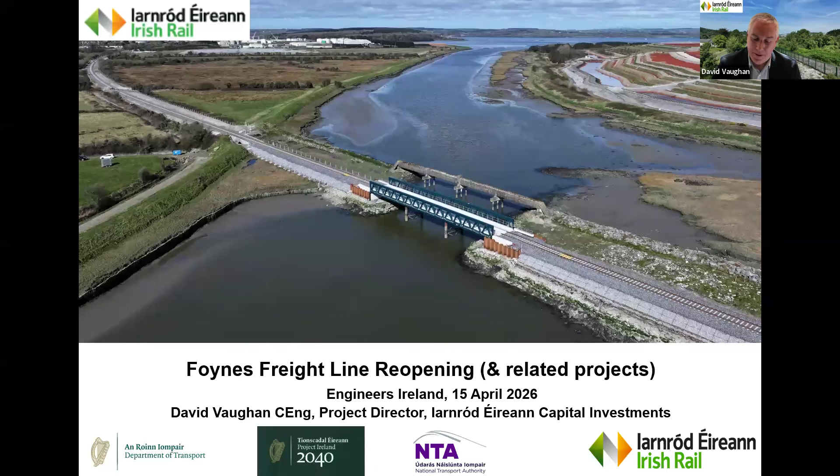So my agenda for the session is to give you a brief history of the line and why we're reopening it now, the project at a glance, an overview of the scope and delivery, some engineering highlights with lots of photographs, a little piece on stakeholder engagement, and then some of the challenges and solutions that we came up with. A brief touch on the benefits and impacts, and looking ahead for the line.

I'm going to also cover a small piece on the Adare bypass and the rail overbridges that myself and my team delivered in parallel with the railway project, to enable the bypass scheme to progress at pace. And I'll touch on as well some work we're doing with the Ryder Cup 2027 rail transport plan, and then we'll take some questions at the end.

So history-wise, I won't dwell on this because I know we're under some time pressure, but the line itself was built in 1858. It carried bulk freight materials, minerals, coal, oil, zinc, lead. It was a mixed use line, so passenger and freight up to 1963. And then the passenger service ceased. And then the freight business also ceased in 2001.

Now the line always remained under Irish Rail's stewardship. The structures were intact. The corridor itself had very little encroachment. We were commissioned to do a feasibility study into the line reopening back in 2013 by Shannon Foynes Port Company. And then we progressed with preliminary design and planning in 2014, and were then commissioned to carry on with the detailed design stage in 2017.

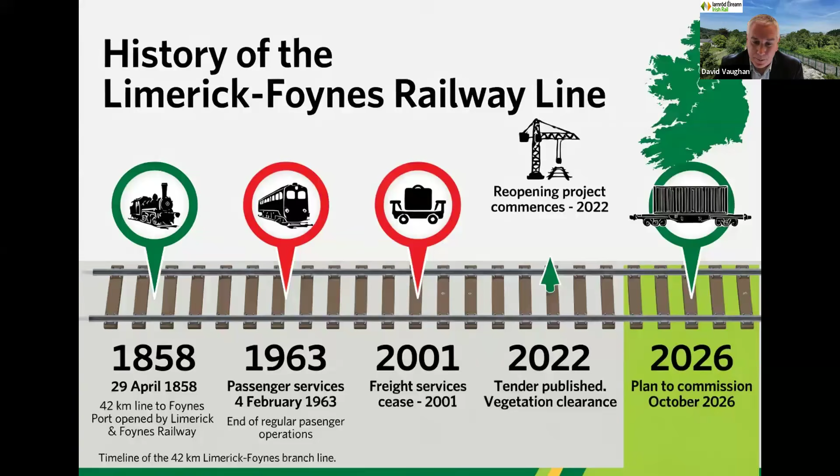That was, again, spearheaded by Shannon Foynes Port Company, in fairness to them, and co-funded in the latter stages by some European funding. We finished that in 2019, and really there was no funding to progress the project, so it sat on the shelf until in 2022 a funding opportunity arose, and we had to quickly dust it off, update the documents, and progress at pace.

So why now? Well, it is a key objective of the Irish Rail freight strategy. One of the objectives, without going through it blow by blow, is to either connect or enhance connectivity to all of our main ports, and to grow the market share for rail freight. So this is a key plank of that strategy. It's also a key feature of the Shannon Foynes Port Master Plan 2041.

It satisfies several EU, national and regional development objectives, including providing part of the EU core network on the North Sea Mediterranean corridor. It's a feature of the Project Ireland 2040 planning framework. It's well regarded and mentioned in the Limerick Shannon Metropolitan Area Transport Strategy, which is a mouthful, but better known as LS-MATS. Also, numerous objectives in the Limerick Development Plan 22 to 28, and then it is also heavily featured in the All-Island Strategic Rail Review. So, well covered from a strategic context perspective.

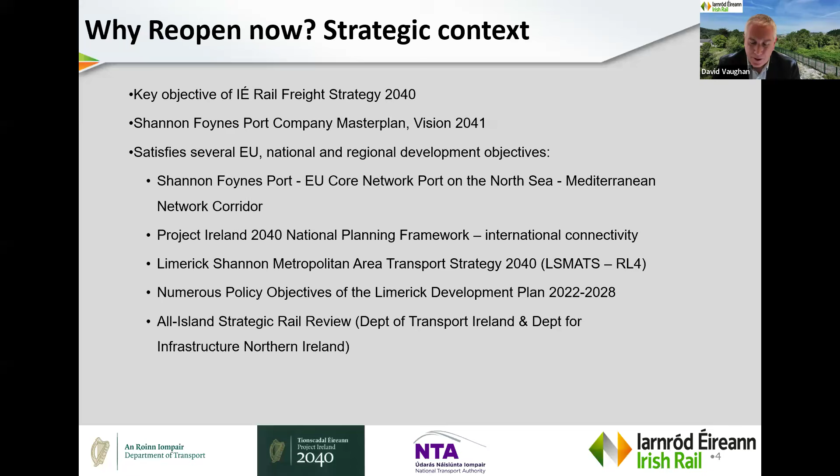The project at a glance: it's a 42-kilometre long rail corridor, single track line, and the total investment is 151.5 million, funded by the Department of Transport and the NTA. The line speed on opening will be 50 miles per hour, with a journey time of approximately 53 minutes from Limerick to Foynes, and there is scope to increase that to 70 miles an hour in due course. Our main contractor is John Sisk and Son. Our main consultant is O'Connor Sutton Cronin.

There's 81 structures along the route. This is underbridges, overbridges, and culverts. There were 67 level crossings, including 13 public road level crossings. And we're on target to complete the works and commission the operations in Q4 this year. October bank holiday weekend in particular is our commissioning weekend. And when I mentioned updating the documents in 2022, we increased the spec to make it future-proof for potential passenger services.

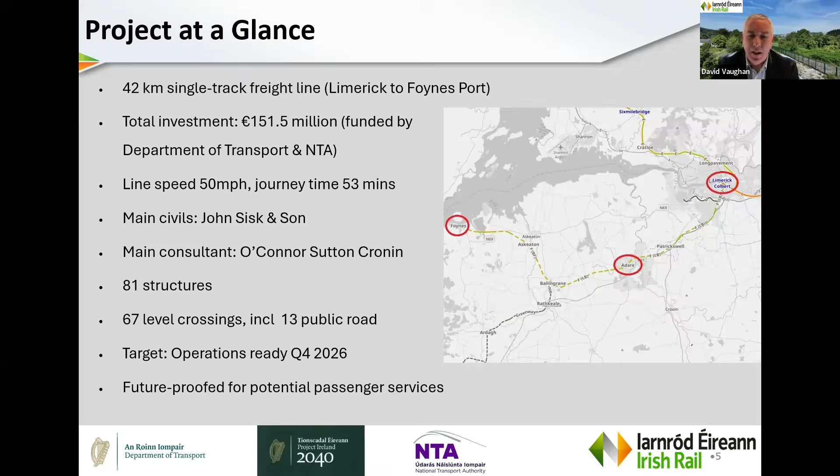So just to give you a feel for the corridor itself, this is a busy graphic, but bear with me. The railway line itself is indicated here in black. The blue dots represent public road level crossings. They were once operated by gatekeepers, now all being upgraded to CCTV type remotely controlled level crossings. The red dots are really like place names, just for people to understand the geography. A number of them were former stations along the corridor, including Patrickswell, Adare, Ballingrane, Askeaton.

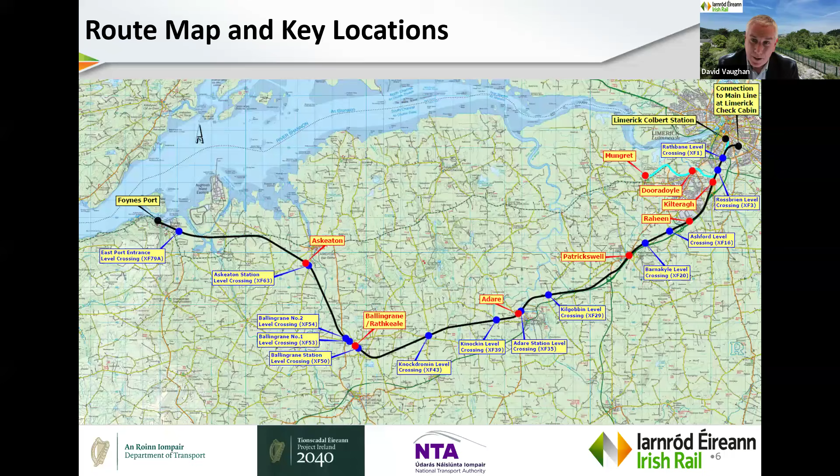The light blue line just up in the top right there, or cyan you might call it, is outside of the scope, but it is the old Mungret spur line. And then also on the top right, you might see what we call the North Kerry Curve, which was the former connection into Limerick Colbert Station. They're not in scope, but for the sake of getting your bearings, I just wanted to leave them on the graphic.

So scope and delivery strategy. We split the project into two packages or work streams. The first we called Work Package 1, Track and Civils. This was funded by the Department of Transport. It involved vegetation clearance along the corridor, replacement of the old track with new sleepers and rail on a fresh bed of ballast, rehabilitation of the bridges and culverts, including renewal of Robertstown Viaduct, the signature structure on the route, which I'll come to further. Upgrading the road infrastructure at the level crossings, and then renewal of line-side fencing and drainage.

Then Work Package 2 followed on, and this is what we call operational readiness, and this is the signalling for the route, including the CCTV level crossings. GSM-R train radio, so GSM is the technology a lot of us are familiar with for mobile phone networks, but there's a version of that which is for railways only, hence the R, and that allows communication between our trains and our control centres.

And we were also endeavouring to eliminate accommodation level crossings where practicable. So this is really only by agreement and where cost effective. And in work package 2, we put in our track connections at Limerick and at Foynes Port, and then also at roughly the centre point of the line in Adare.

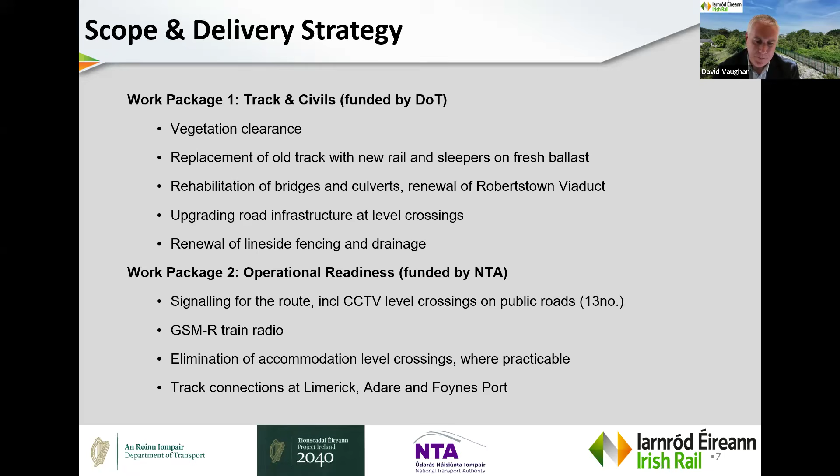So procurement wise, this is really a mixture of procurement and organisation. My team in Irish Rail looked after project management and track design and some bridge design, and I'll come to that later, and then the safety approvals, both internally and with the Commission for Railway Regulation. And our signalling and CCTV level crossing design was all managed, designed and installed in-house by our signalling, electrical and telecoms department. They looked after the procurement of all their own materials for that.

Rail and sleepers, we procured the rail. We have obviously a supply contract for rail, so that was procured very early in the job and delivered to Foynes Port. Sleepers, we normally manufacture sleepers ourselves. We manufacture a lot of sleepers every year, but this project came at us fairly quickly, and we couldn't meet the demand for the sleepers, so we procured those by competitive tender, and they were shipped in from Germany.

The main consultant I mentioned earlier is O'Connor Sutton Cronin. And the main works contract was an employer designed contract, public works. We moved quickly with it. We did an OJEU notice published in July 22. We basically got the green light in about June 22, published the notice in July, issued tenders in September, and awarded the contract to Sisk by December. And the scope of which was, as I mentioned earlier, mainly the earthworks, the bridges, the level crossings, track laying, and the civils for signalling.

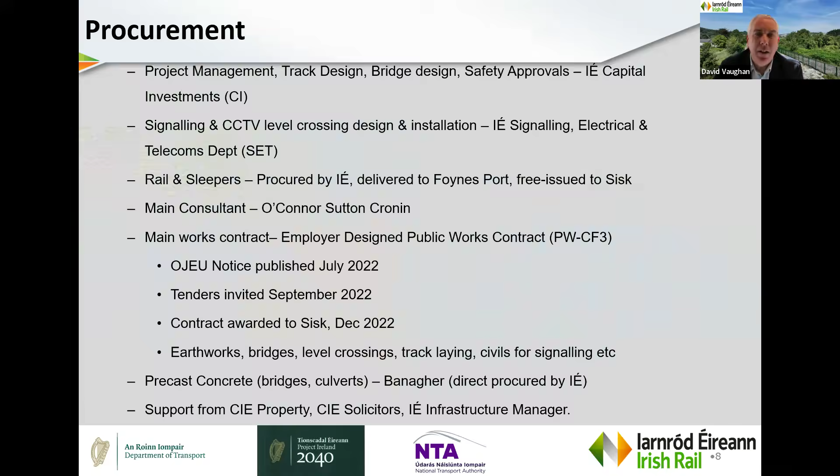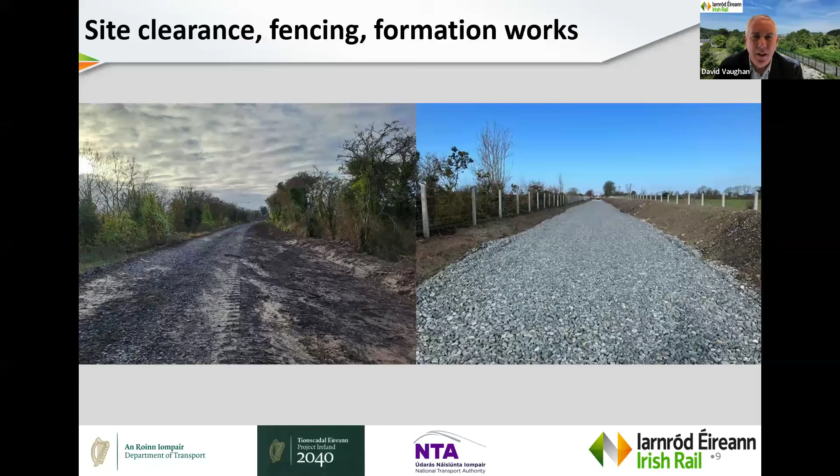The bridge and structure highlights are probably a bit more meat in those. So a couple of the signature bridges really were the River Maigue and River Deel. These are steel structures. They were lifted out, refurbished off-site, painted, reinstated. I have some images for that coming up. We had good collaboration between our own Irish Rail Bridge Gang and Mack Engineering, who were working for Sisk. Our bridge gang specialise in the refurbishment of old structures, and it was a very good collaborative effort to bring some of these structures up to date to modern standards.

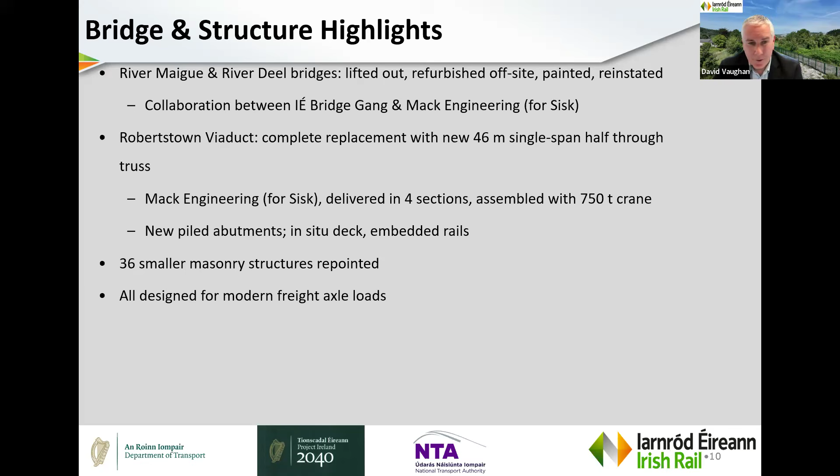Robertstown Viaduct. This was a replacement of a 3-span bridge with a 46-metre single span half through truss. Again, that was fabricated by Mack Engineering for Sisk and delivered in 4 sections and assembled on site with a 750-ton crane. And then some new piled abutments, and I'll show you some images of these shortly. There's 36 smaller masonry structures repointed along the corridor, and all of our new structures are designed for modern freight axle loads.

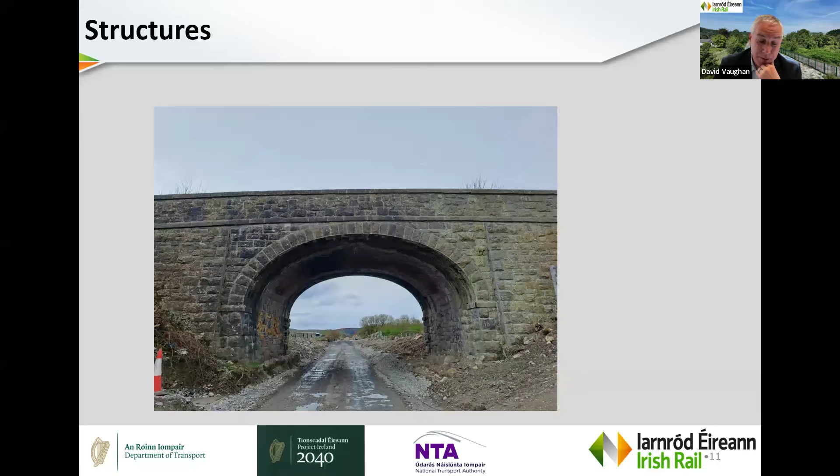So this is a typical masonry arch bridge. This particular one, we call it OBF 15. Cleared of vegetation, repointed. We had 15 similar bridges that got this treatment, over bridges that is, and then I think approximately 14 under bridges, similar masonry arch type structures.

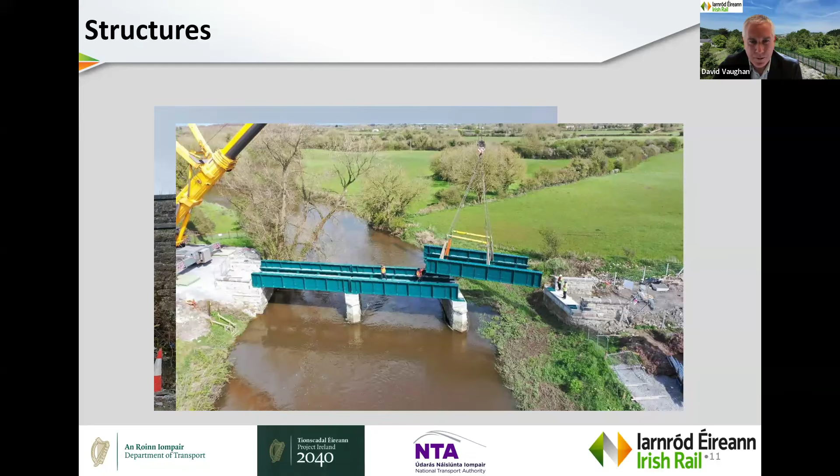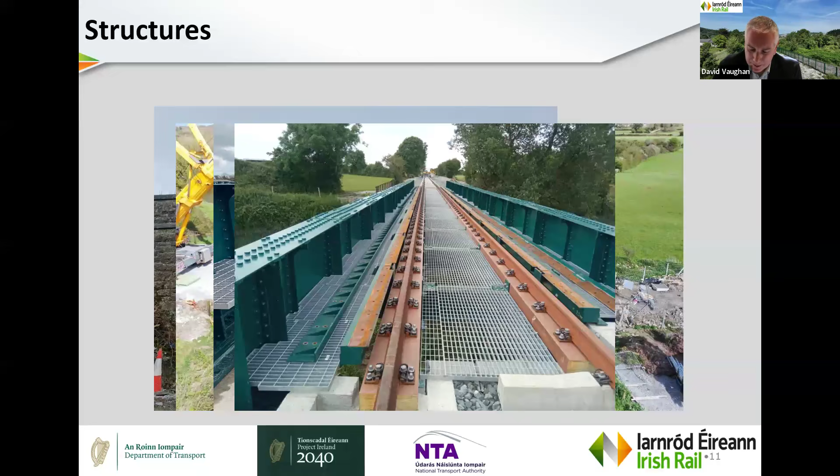This again is the Deel, just getting ready to receive its rails, and here it is, post rail installation. And then another structure, not necessarily bridge related, just on a view into Roxboro, which is close to Limerick City. New retaining structure built on the boundary there. It's just quite tight on the corridor.

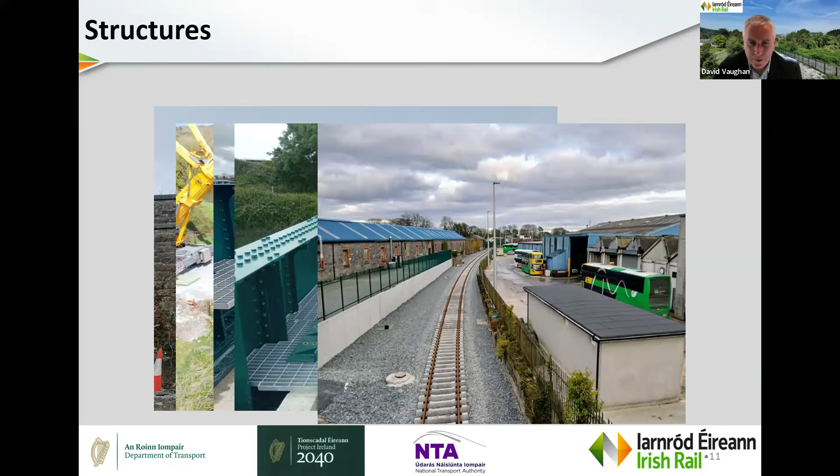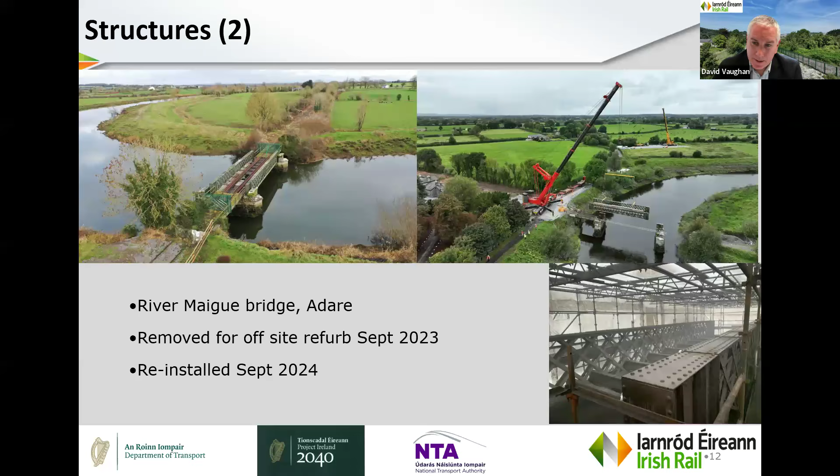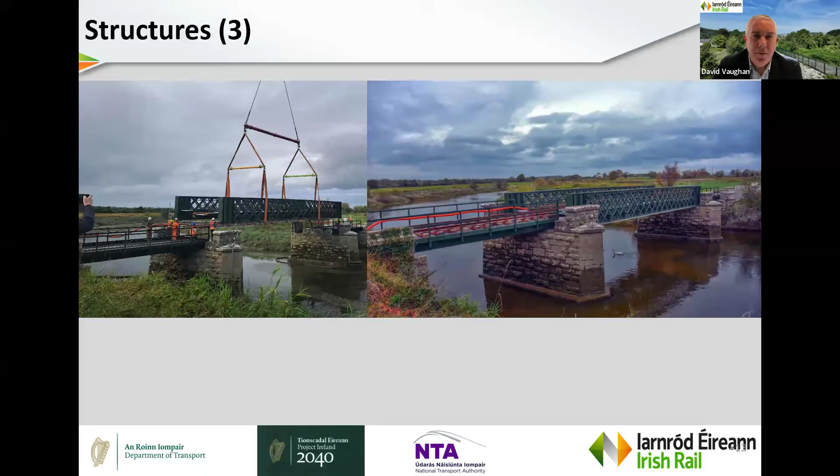Another key structure on the corridor, Robertstown Viaduct replacement. Again, sitting in over an SAC. What was a 3-span lattice truss was beyond economical repair, and we decided it needed to be replaced, and we said we'd replace it with a 1-span truss. We got planning consent for that back in 2019.

And the scope, obviously a key feature was to protect the SAC. We needed to reinforce the existing causeway; we used a combigrid solution there, 300 mil lifts. There's piled abutments, concrete sheet piles. I'll show you some images now shortly. New steel and concrete deck, and then this was finished in June 24.

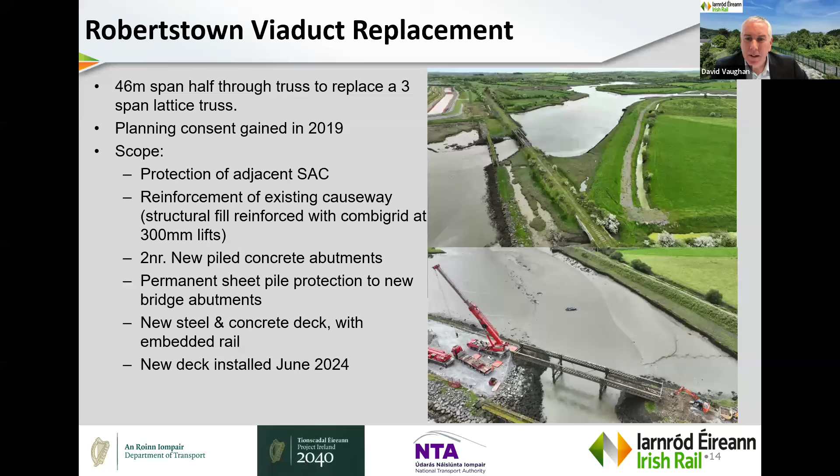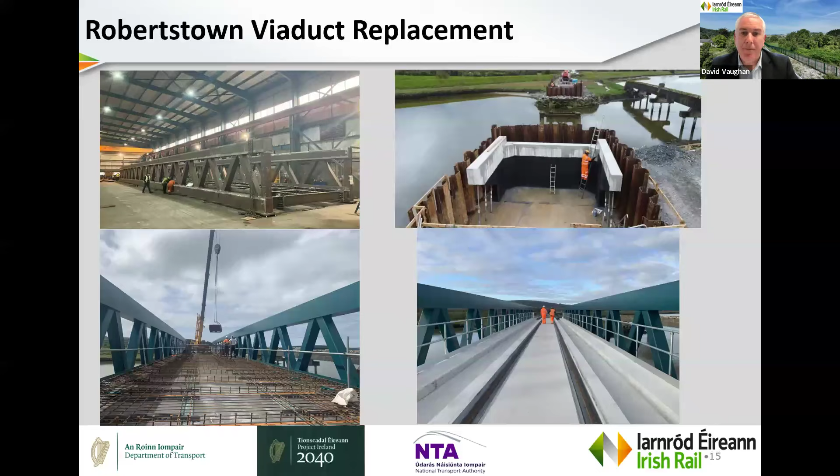So track renewal, obviously a key feature of the project. We've 42 kilometers and some of continuously welded rail, over 66,000 concrete sleepers, 220,000 tons of new ballast, and we put a lot of effort into the reuse of spent ballast on the site. So we tried to minimize the disposal of material off site. So a lot of spent ballast was used as fill materials to build up embankments and walkways and so on.

Our rails were delivered in 36-meter lengths, all delivered into Foynes port from Spain. And then our old materials, well, rail we saved and sold for scrap, and the sleepers were exported for appropriate disposal.

CISC employed a specialist subcontractor, Steconfer, for the track laying, and we built a special test track out in Askeaton. This was to certify the plant. They developed a lot of bespoke plant tailored for this particular job and for the Irish gauge, and a particular installation methodology. So we built a test track to sound that out and get the appropriate approvals in place before it was progressed at scale. Track laying, at its peak, was up to 2 kilometers per week, being achieved by Steconfer.

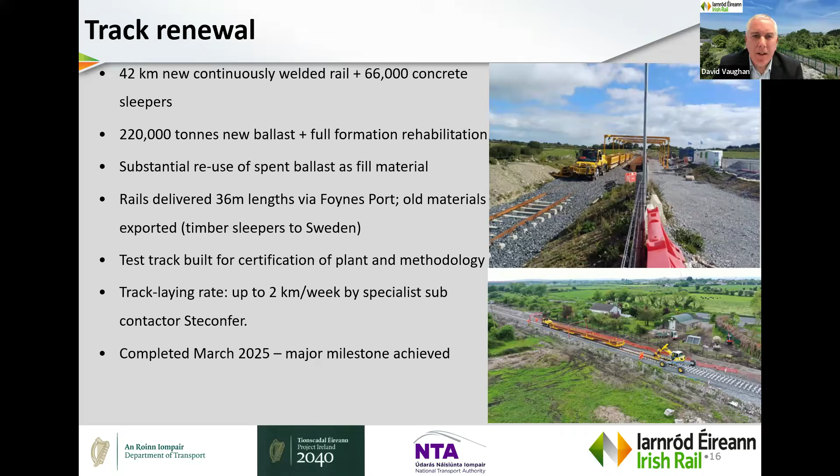Some of the methodology employed there. So the rail was moved by road to a rail head in Askeaton. Let me see if I have an image here. I don't.

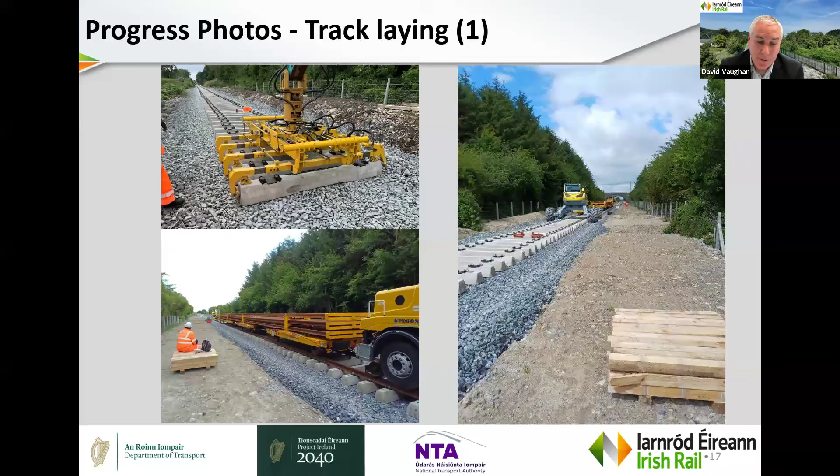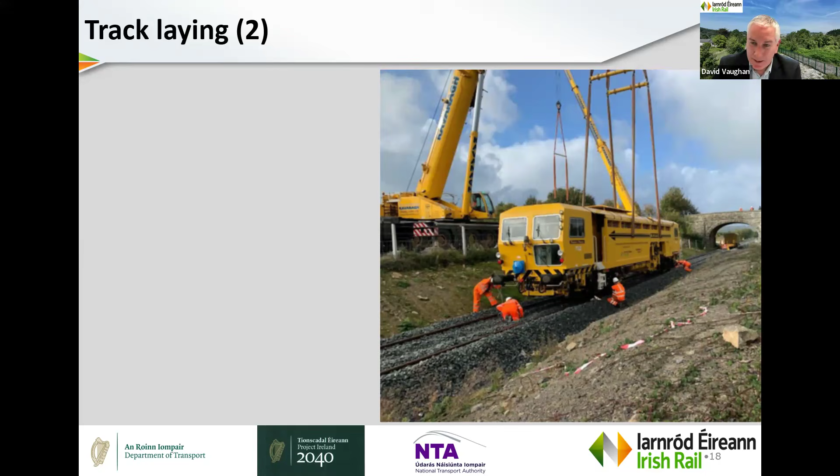And it had to be lifted in by crane because the line obviously isn't connected to the main line, and this vehicle would normally travel around the network by rail, but in this instance, obviously we had to deliver it by road. And this is just an active site of rail laying activities out in Adare at the time. So one of the few sections of double track on the corridor.

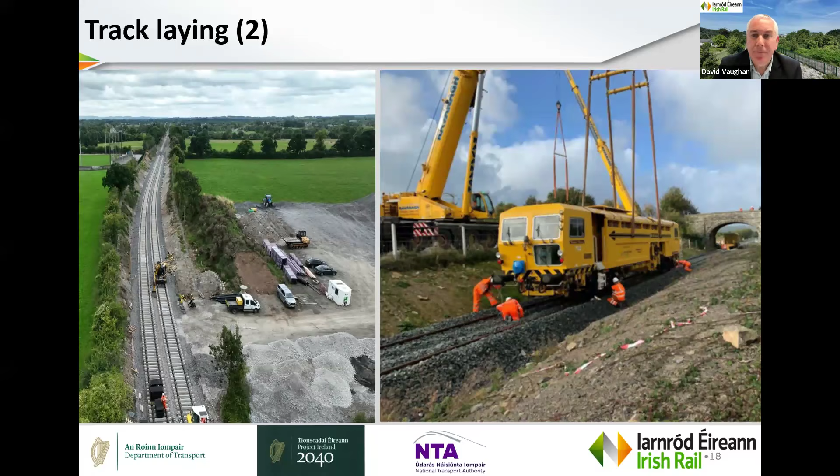Level crossings and signalling, like I mentioned at the start, we had 67 level crossings along the line when we started. 13 of those were former gated crossings, gatekeeper operated, and we were to upgrade those to CCTV type crossings. And then our user-worked crossings, we endeavored to try to close them where we could by agreement.

So we managed to do this, some by buyouts, some lands had changed hands and therefore the crossing was no longer justified. And then at a number of them, we built an alternative structure to take people either over or under the railway. These are agricultural type crossings, I should mention.

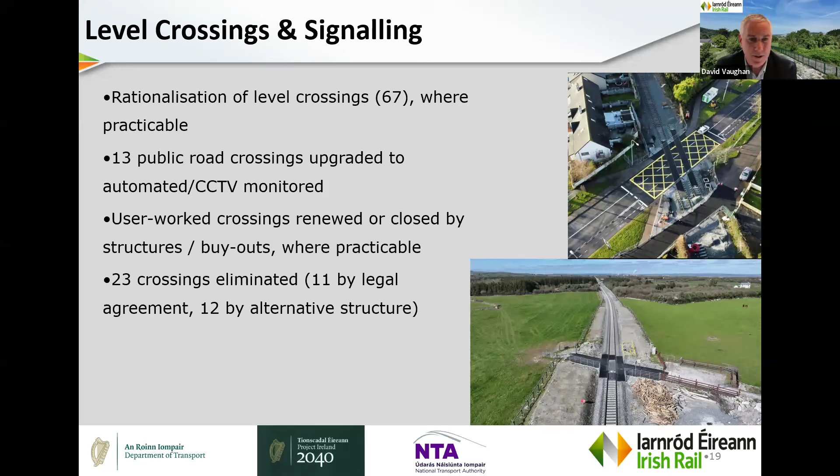So a couple of typical examples. Here we have this one we call XF24 Mann's, which is just east of Adare. So this is a new overpass, with four similar structures built along the line. These were designed in-house by our structural design section, and we procured the concrete for them, and then we free issued the concrete to CISC to carry out the construction.

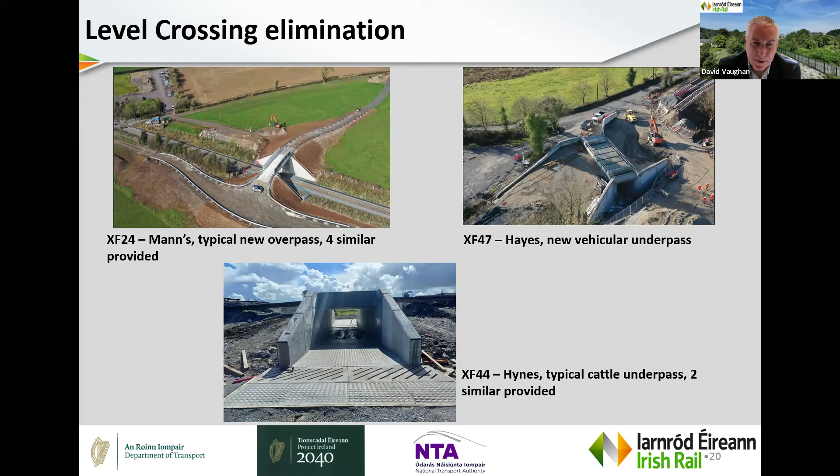On the right, we see XF47, we call it Hayes, and in this instance, just with the topography of the land, an underpass was the more appropriate solution. So this is a vehicular underpass to suit the farming activity at that location. That's now complete. That's a photo from during construction stage. And then at the bottom, a smaller underpass with two of these, a cattle underpass at XF44.

CCTV level crossings, just to give you a feel for what they involve or what they look like. We've 13 of them along the corridor. You'll note really from the images the scale of the infrastructure. There's a lot besides the barriers and the flashing lights. There are equipment rooms and a lot of ducting and chambers in the vicinity of a level crossing. And then at a couple, we also have co-located masts for our GSM-R telecoms network.

So a lot of intricate detail, a lot of cooperation needed as well with the roads authority to map these out, and a lot of engagement with local stakeholders. But there were areas where we needed to acquire small pockets of land to site this various equipment, and this has been ably managed by our internal signalling department, working in collaboration with CISC, who are doing the groundworks.

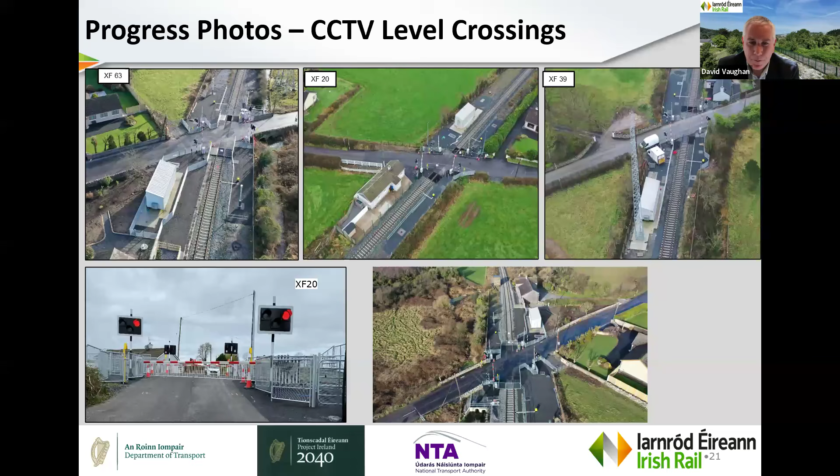And then dotted along the line, we have approx 50 signal sites. Now they vary in size and scale, but say typically 10 meters long, 3 meters wide. They are set in advance of the railway level crossings. We're obviously having to feed them with ducting chambers. There's a ring of ducts and chambers at the particular level crossing, and then running out to the distant signals. The ducts were typically put in by CISC, and then the cabling is done by our internal department.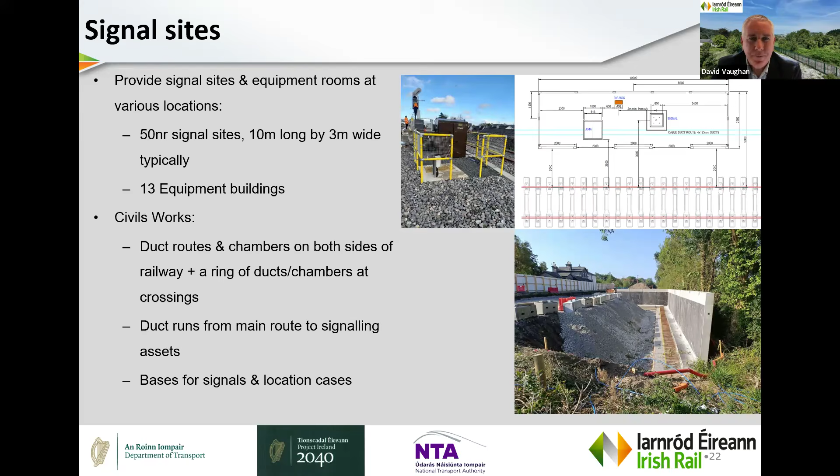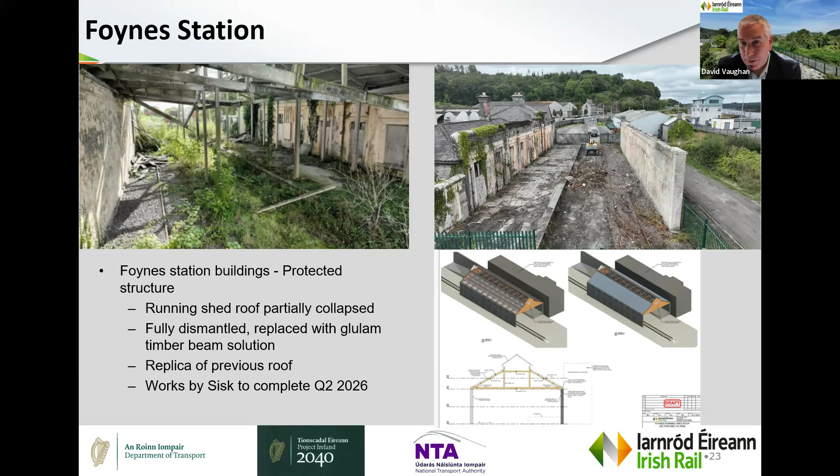The image to the bottom right is what's envisaged to be the finished article. Obviously a work in progress there post the dismantling of the roof there on the top right. And here it is, some recent photos.

I think it's even come on a lot. It's actively being slated as we speak, and that slating is due to run through the rest of this month, and then by early May we should have the finished roof.

In Foynes Station itself, we have a separate contract procured, just about to be awarded, for the refurbishment of the station buildings. This is to suit our staff accommodation associated with the operation of the freight service in the port. So that'll be awarded in the coming weeks and on target for completion at the end of the year.

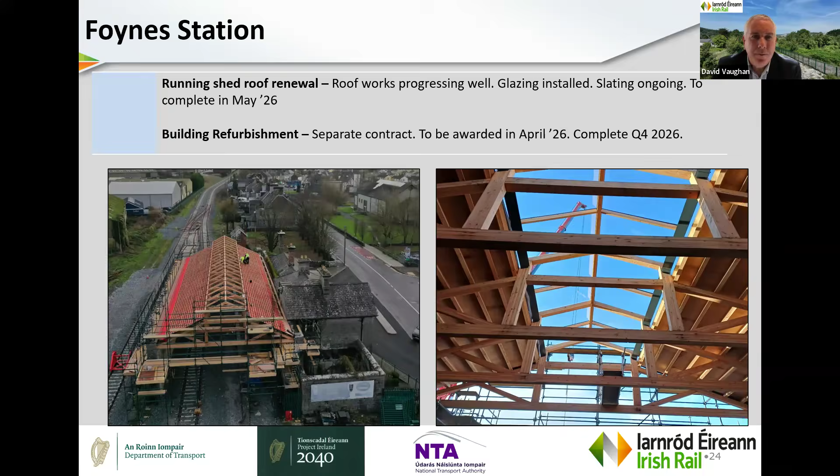Stakeholder engagement, obviously a key facet of the project and of all, I suppose, successful projects. I'm conscious that we started the project from a standstill, so there wasn't as much time as you might like to warm up stakeholders. That said, we did our best. We set up a dedicated project website and email contact. We had regular engagement with public reps, the IFA, farmers, neighbouring properties.

CISC would circulate a quarterly newsletter with general updates, and then we'd have specific letter drops when there was specific activity happening in somebody's vicinity. Look, there's always room for improvement on these things, but I think we did okay overall.

So engineering challenges and its solutions. I've touched on them as I talked through the photographs there to a degree, but the narrow corridor is a key issue. Only 5.5 meters wide in places. So the site was split into shorter sections, and what were coined as logistics centres were established, to feed the site with key materials.

There was a lot of off-site fabrication, as I've referred to previously, and then just-in-time deliveries so that we didn't clog ourselves up. So we were able to have a stockpile of ballast. CISC brought in a lot of ballast and stockpiled it at strategic locations along the corridor. Sleepers were supplied, but they were all in Foynes Port along with the rail, and then were distributed along the corridor to suit the works.

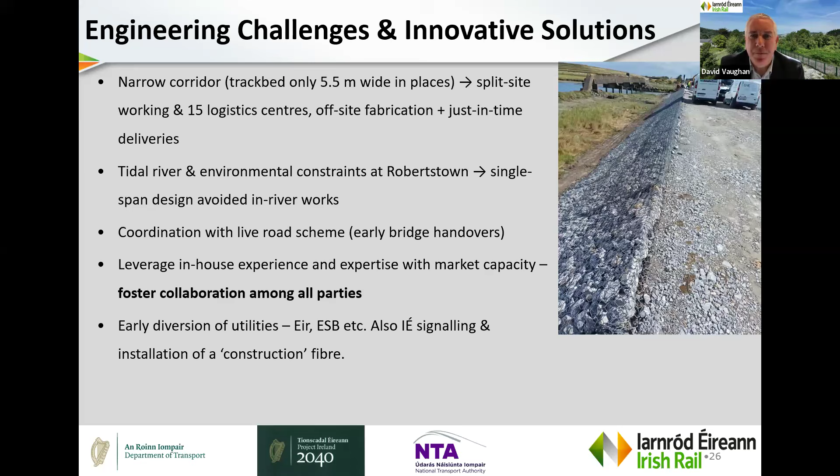So the benefits, look, it delivers a missing link for the EU Trans-European Core Network, which is one of the key goals of the project. It enables access by rail to Foynes Port, which supports its role and its goals to be an international transport gateway and to grow itself as an international transport gateway. It'll lead to an economic boost for the Midwest and the Shannon Foynes Port area, we believe.

It obviously provides a robust, resilient rail freight network, the beginning of a network, which will provide an alternative to road freight, and in many ways complementary to road freight. Like there's still that first mile, last mile piece. It's always a joint effort to make freight work. And the reopened line will be a strong platform for a future passenger service in due course, and integration with other Midwest projects that are in the pipeline or on the horizon.

Now, I'm going to move on. I'm conscious of time. I'm not doing too badly.

I mentioned at the agenda that there was the Adare bypass. So this is a project that's been in gestation for many years, but suddenly came to life with the injection of funding. And we were asked in late 23, I think it was, would we assist with the delivery of 3 road overbridges for the road scheme. So the bridges that were to go over the railway, would we deliver them for Limerick, which we did. Approximately 13 million euro. We delivered them ahead of time and budget, and I think helped with the fast tracking of the Adare bypass scheme. I'll give you a little bit more insight into that.

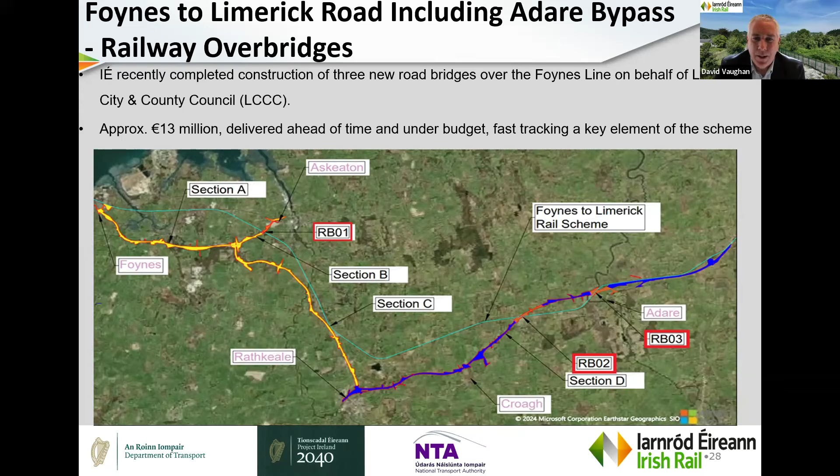2 of those structures, just from the graphic there, one is east of Adare, one is west of Adare. They're the ones obviously critical to the Adare bypass. A third structure is out near Askeaton. Less critical, but the view was let's deal with all of the rail interfaces on the road scheme in one go. And so that's what we did. Our scope was to deliver 3 overbridges, all of same span, 15.2 meter span, ranging in width some 32 meters with the one out in Askeaton, compared to approximately 80 meters for the 2 near Adare. There are similar details for all of the bridges employed.

Y beams supplied by Banagher, reinforced earth retaining panels, and H4A parapets and H4B as well. And then the other elements in our scope were the RC deck, the waterproofing, vehicle restraint system, fencing, drainage, and embankment construction. And we weren't finishing these to full handover. We were to finish them to a point where they could be handed over to the roads contractor and used as haul roads. That was our brief. The image on the right showing a not quite completed but progressed structure.

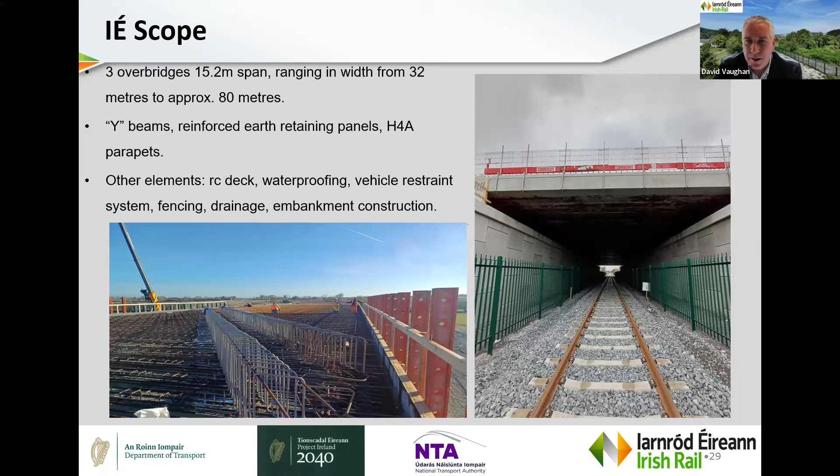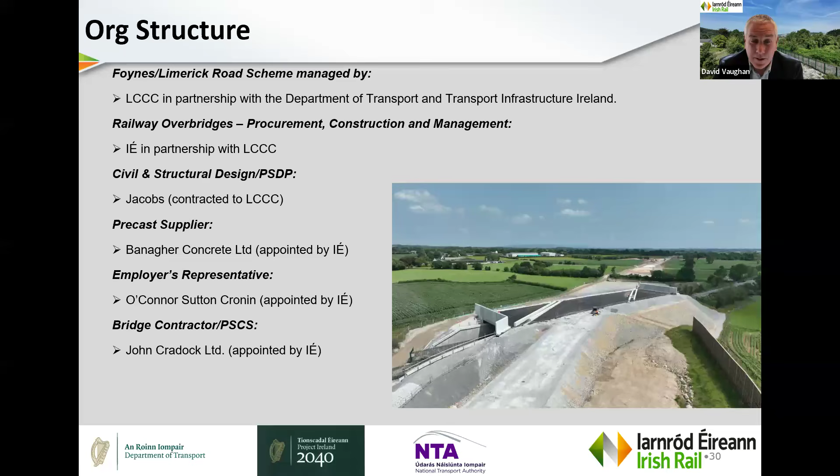So an unusual, I suppose, organizational structure, but we made it work. And again, collaboration was the key. So the scheme was managed by Limerick in partnership with the Department of Transport and TII. We were to procure the bridges, again, with close cooperation from Limerick. Jacobs were the civil structural designers for Limerick and PSDP. We procured the precast concrete. We have a pre-qualified panel of suppliers for precast concrete, so we were able to move fairly quickly. And Banagher won that competition for the bridge beams. O'Connor Sutton Cronin were acting for us as ER and RE, and then John Cradock Limited won the contract to build the 3 bridges.

Here we are with them under construction. So we managed the procurement, construction stage and interfaces with the rail project. Obviously, one of the reasons that Limerick came to us is because we would have been best placed to manage the interface with the ongoing railway project. We had our main contractor, CISC, carry out the preparatory works within the railway corridor, just to not blur any lines of responsibility and PSCS duties, just manage that interface risk.

Our input to the delivery strategy when we were first engaged by Limerick was to say, look, time is of the essence. So let's get site access and compounds in place early, and Limerick were in a position to do that with an enabling works contract. And then another key plank of it was that we said we should procure the precast concrete early and have that in fabrication and ready to be free issued to the contractor when he was appointed, and that worked out very well.

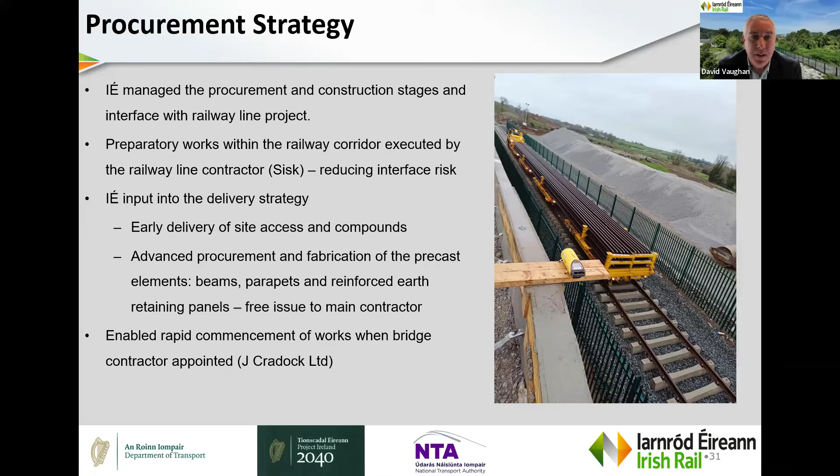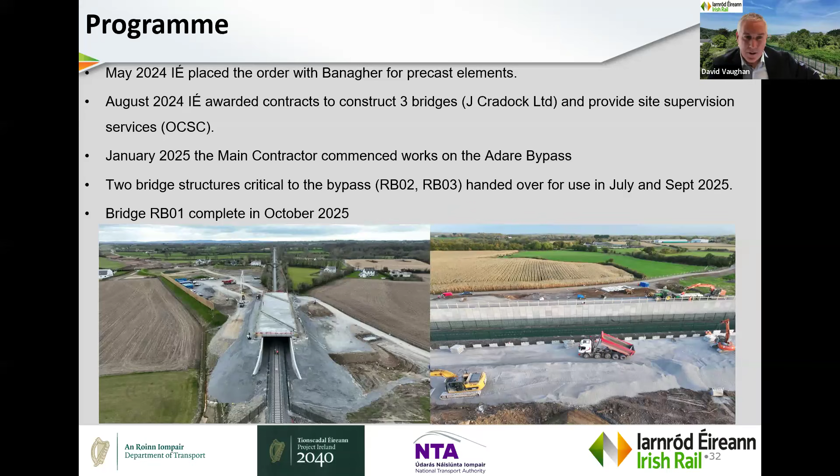So we placed the order for the concrete in May. We awarded the main contract in August, and it wasn't long after the main contractor mobilised that we were able to feed him with precast concrete. The Adare bypass main contractor then commenced in January, at which point we were making good progress with the construction of our bridges, and then we handed them over in July and September respectively last year. The third bridge, being less time critical, was handed over in October.

Now, I just think I'm okay time-wise, but yeah, a little bit spare.

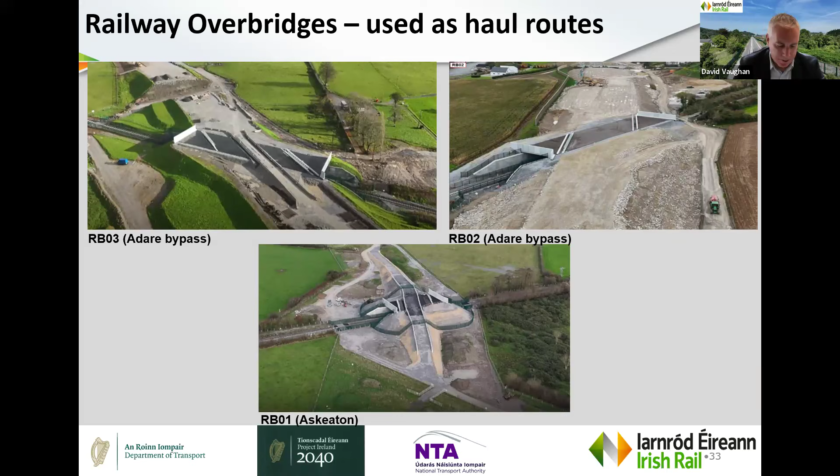I'll just give you the one last piece here, which is on the Ryder Cup 2027 rail transport plan. So this is another project that came at us while we were doing the freight line project, and the remit was to design and build a station facility in Adare for the Ryder Cup, which is due to take place in Adare in September 2027. We did some optioneering and some consideration of solutions, and we landed on a single temporary platform. We issued tenders for construction on that back in December, and the contract was just awarded 2 weeks ago. Contract was due to mobilise at the beginning of May.

So the project management for that is from my team. Again, we're supported by O'Connor Sutton Cronin. We did maybe see this potentially coming, so that the track and signalling design through Adare doesn't need to be changed whatsoever to accommodate the platform. So that was beneficial. It's still a work in progress, but in principle, the plan is to run a train service to and from Adare from Limerick Junction for the week of the event.

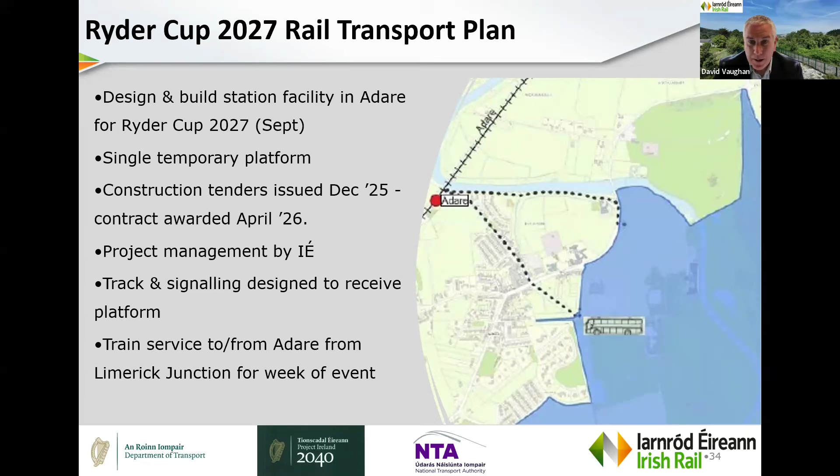So just to give people their bearings. Limerick Junction obviously is well served by trains from Dublin, Cork, Waterford, Tralee, Killarney, all of which are kind of mooted to be accommodating Ryder Cup attendees in various hotels. So people get themselves to Limerick Junction, and they transfer onto a shuttle train, which will take them into Adare in approximately 45 minutes.

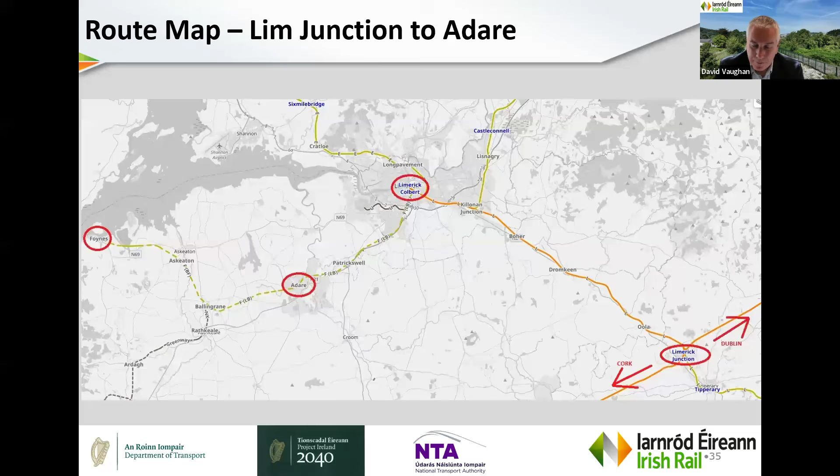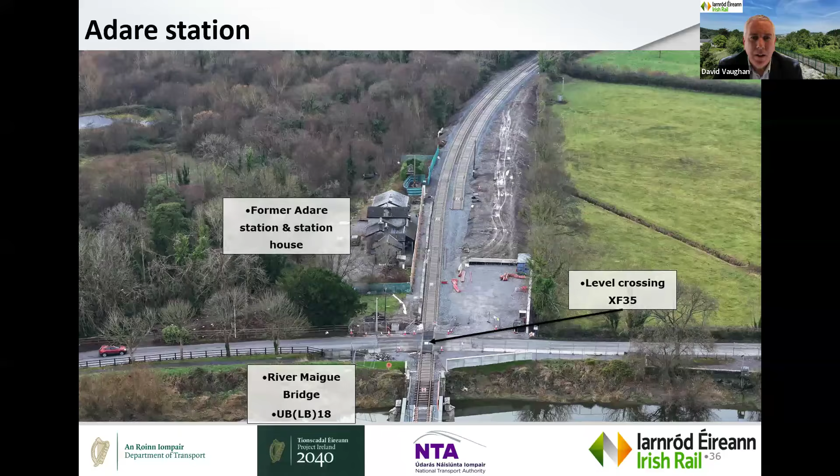So just to talk you through a bit more detail on that. The image on the top left is effectively our concept solution, single platform. A queuing area will be prepared, as indicated there in the bottom right. The old station building will have minor works through it. We don't intend that passengers will be passing through that building, but it will accommodate our own staff during the week of the event. And the image to the top right there, you see that a lot of site clearance had taken place late last year, and that's the area where the platform is going to be built.

And then bottom left there is really, again, a concept stage solution for a temporary platform. So it's temporary in nature. I don't think it'll be very apparent to those using it. It is being designed to be equivalent to any passenger station platform, so compliant with all of our usual rules and guidelines, and persons with reduced mobility, etc. So our view is whether it's in use for a day, a week, or forever, it needs to fully comply with all of our standards.

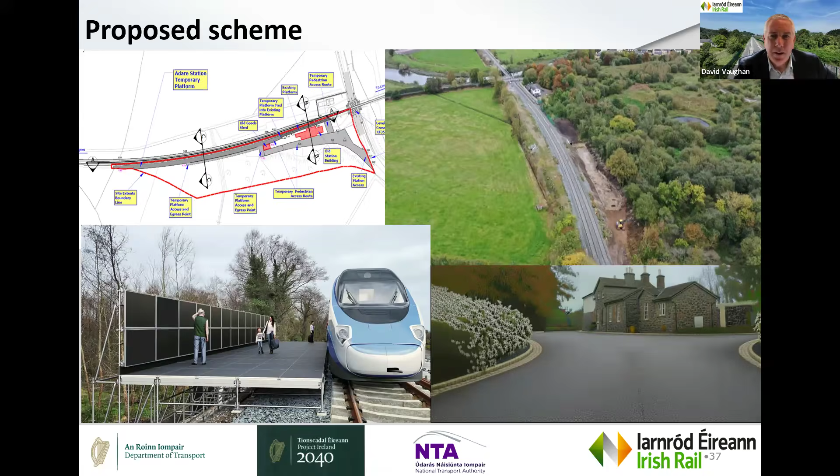And that is everything I've got, and I'm happy to take questions.

Thank you, David, for that very interesting and insightful presentation on the reopening of the Foynes freight line, as well as the other ancillary projects that you mentioned in your presentation that Irish Rail were involved in in the Limerick and Adare area.